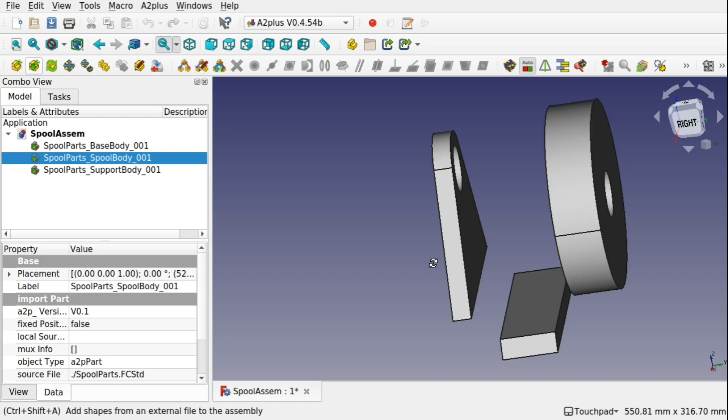Each of the bodies is a separate part which we will assemble together. We'll only briefly stay in the assembly workbench just to place those parts together. It is not the main focus of our workflow, but in later lessons we will go deeper into assembly workbenches and how to use those for animations and simulations.

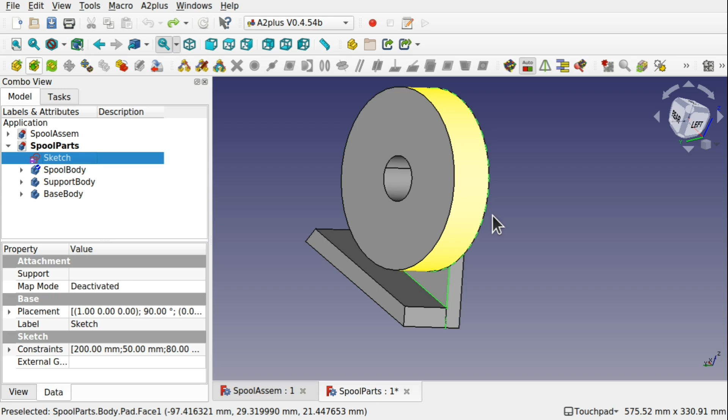In this video we're going to look at how to use a master sketch to create a very simple spool holder. So this is what I've created. I haven't put much detail in here, it's just to get an understanding of the process. So each of these parts are a separate body and they've all been created from one sketch. So this is the sketch they've been created from.

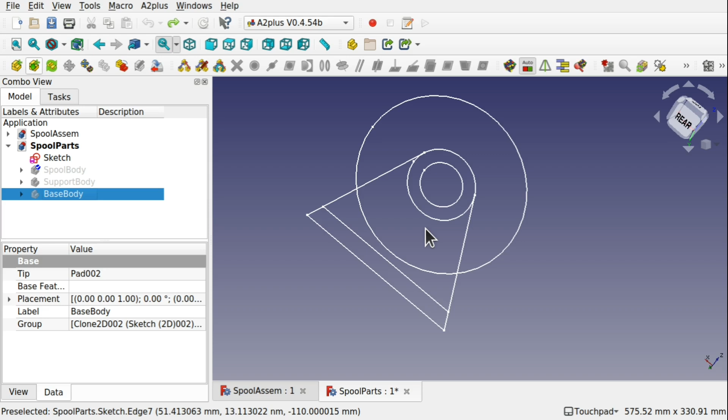If you come from a Fusion 360 background, then this will probably look familiar to you because you'll create a sketch like this and then extrude the parts, picking parts from the geometry and either using extrusions or pockets from there, where FreeCAD uses a more sketch on face route. It doesn't have that ability, but we do have this master sketch process.

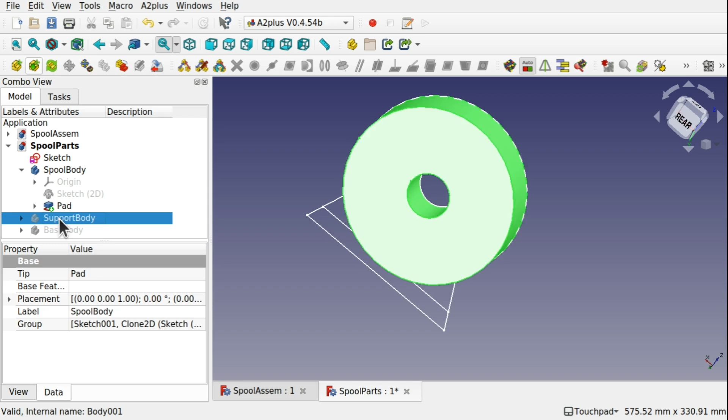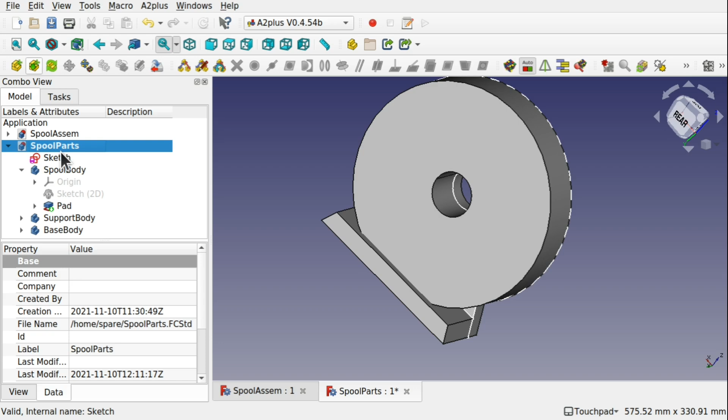So I have this master sketch here, which is all the dimensions basically from a profile view of that piece. We then use that in our spool body, our support body and our base body, which means that if anything changes in the sketch, say for instance I change the diameter of the spool, hit close, it gets reflected throughout the parts themselves. So I'm going to come back into that sketch and just change that back to 200,

and that's changed something like this height here to 150, and close that, and you can see how that's changed and taken effect there. So let's have a look how we do this in FreeCAD and learn about the technique.

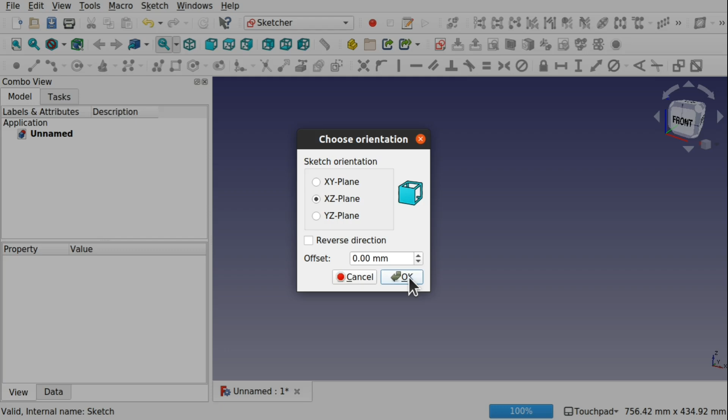So we're in FreeCAD and I'm going to jump over to the sketcher to create our master sketch. If I create a new sketch in here and go along the XZ plane, we're looking at creating a spool to hold some line or some string that we can store on a shelf somewhere. Now I don't know the dimensions of the spool, so we're going to be roughing this out in the master sketch, and this is what a master sketch is for.

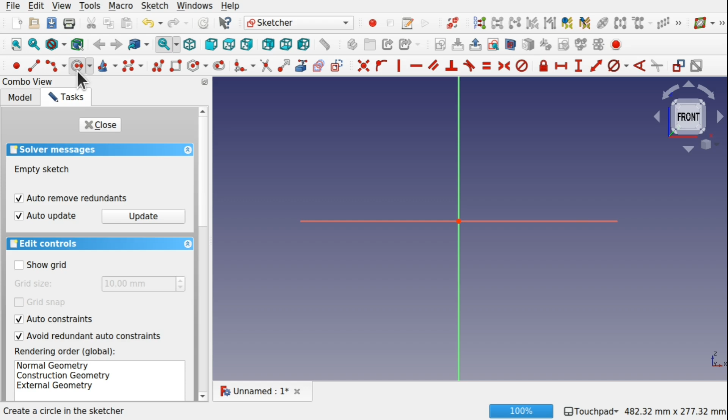You create your view from one side of the whole assembly and then you use that and reference it in your other sketches. So we create a circle for the spool, and I'm going to say I want this 200 millimeters. So we put the dimensions in here. This is important that we add the dimensions to our master sketch so we understand what we're looking at and how this is going to sit together.

Now for the stand, I'm going to create two triangular pieces. So I'm going to need a circle in here, and this will hold the bar that goes through here. So a bar will pass through here that will attach this spool to the stand. So I'm going to set the diameter of here. Now I may know my bar diameter, and I'm going to say it's 50 millimeters.

So now I get an idea of how this is going to attach. So the spool is going to be a circle with a hole in it that's 50 millimeters, and the bar is going to go through here. So I can create my other part of the stand now, and I'm going to put a circle in here.

And we're going to set the diameter of this circle. So click on the circle, go to the diameter, and we're going to set it to something like 80 millimeters.

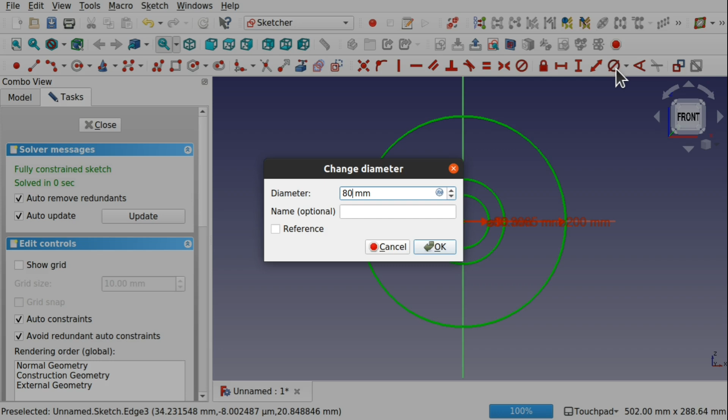Now I'm going to create the lines that come down for the stand, so I'll get an idea of, when I start attaching these lines, how far from the bottom the clearance of the stand should be for a 200mm reel.

Click and click. Escape that. Now they are sitting on there at the moment. This one is tangent to here, which is what I want. So I'm just going to delete that and add that one again.

So that point and this circle, I'm going to make them tangent. And this point and this circle, we're going to do the same, make that tangent. So the tangent constraints are on there, so they will follow that curvature of that circle.

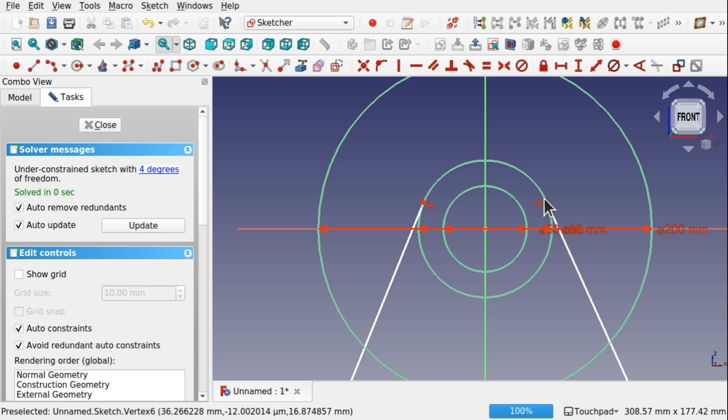I'm going to also click on these two and place a horizontal constraint against those so they line up horizontally. So when I move these, they move like so. I can now position these in the correct place.

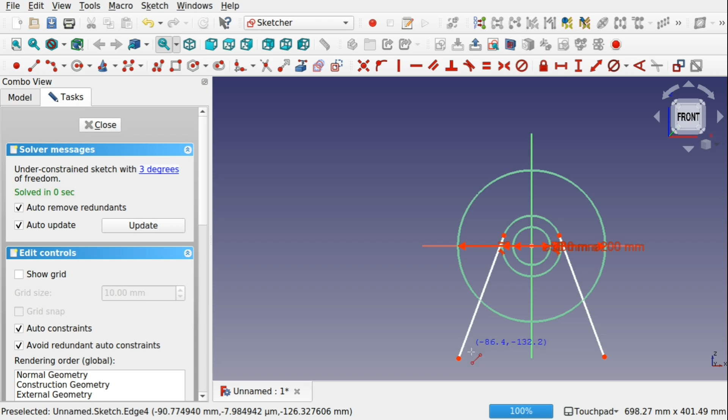And I'm going to create a line between these two points using the line tool and just connect up these two points like so, making sure our auto constraints are on. Let's put a horizontal constraint in there.

So now what we have, press escape. If I move this up and down, I can position this at the correct point, and my constraints are working with me to get this in the position that I want.

Now I may want to put some kind of mechanism in here that will stop this spool from turning when it's not in use. So I can add that, say by creating a block here and creating some kind of pin to stop this, and we'll put some kind of mechanism in there to actually stop this.

So I want a bit of clearance from there, so I would come over to the square tool and actually add that in there like so, and I can actually start creating some kind of mechanism in here. But I'm not going to go into that, I'm just going to keep it simple.

So I'm just going to Control Z that and remove that from there. We've got this now. This is the side piece.

Now I want to create some kind of block here that this will sit on, so we can get an idea of that. So I'm looking at, depending how I want this connected, do I want to just see something like this from the side and the block being in here, or do I want this sitting on top of the block and the block actually coming down here?

So for aesthetic purposes, I'm going to create a line going across here. So this is where our block will be that this will sit on. So remember, this is looking from the side. So this is the block that will sit along here.

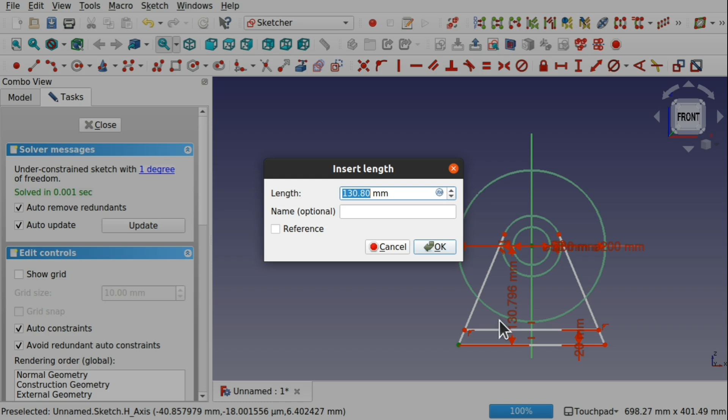So I can set my height now from this point and this center point. I'm going to place a height in. That's 130mm.

And we'll push this out to the left and this one to the right. And we'll just push this up. So we're just separating off these measurements so we know whereabouts they are.

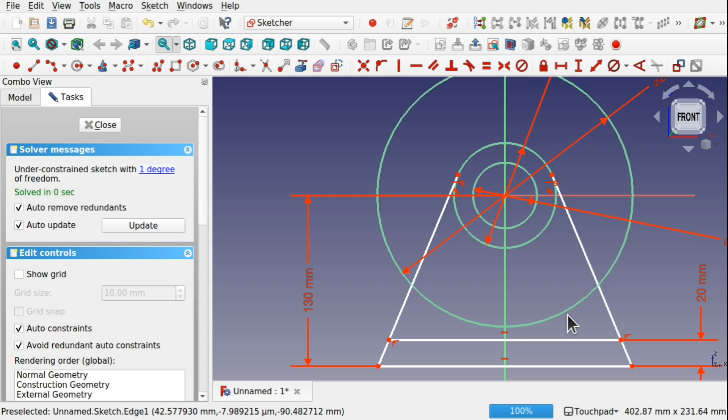I'm not worried about trimming these. I don't have to trim them. It's a master sketch. We don't have to worry about fully constraining the model. It's best to, but at the end of the day, it's up to us.

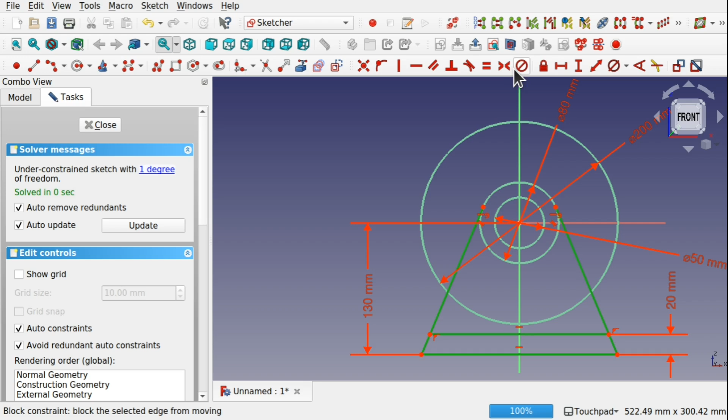If we fully constrain this and we know that nothing's going to move, because we're going to clone this and we don't really want anything to move. Now we can cheat and click all these like so and just use the block constraint against those, and that will block constrain them down. Because it's just a master sketch, we're not worried about the types of constraints that we're using on here.

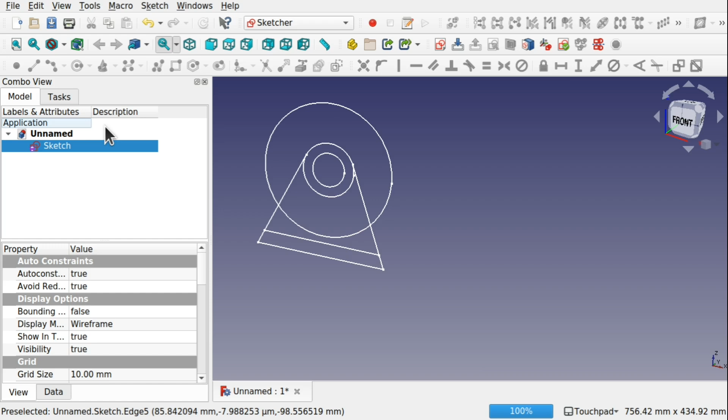So that's the master sketch complete. So this is from the side and this is what we'll be creating. So we can close that now, and our master sketch sits here. We can see that, and this will be basically the profile from the side of what we're building.

Now we can come over to the part design and start creating a body, and we'll create a sketch in here. But first of all, we'll create a body, go back, and we've got this sketch here, but we can't reference this sketch from outside of this body, so we're going to have to clone it in here.

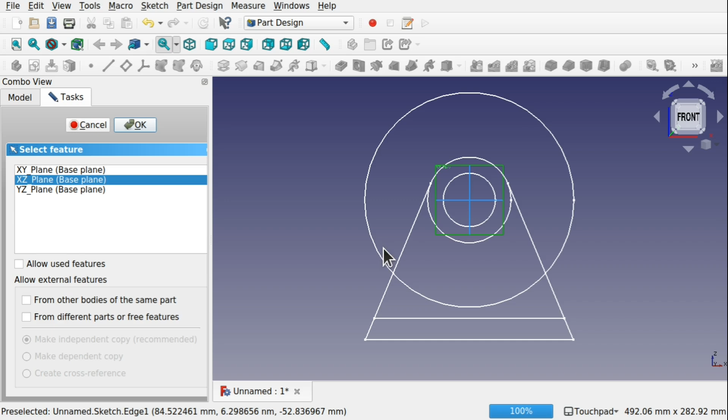Let me show you. Click on the body, come into tasks, create the sketch in there, and we want it along this plane, so the same plane as we've done this sketch in here, the XZ plane. If I hit OK, I'm in my sketch now, it's open. If I try to import the geometry, create an edge linked to external geometry, then I'll roll over this, you can see the object belongs to another body, can't link. So we're going to have to create a clone of this.

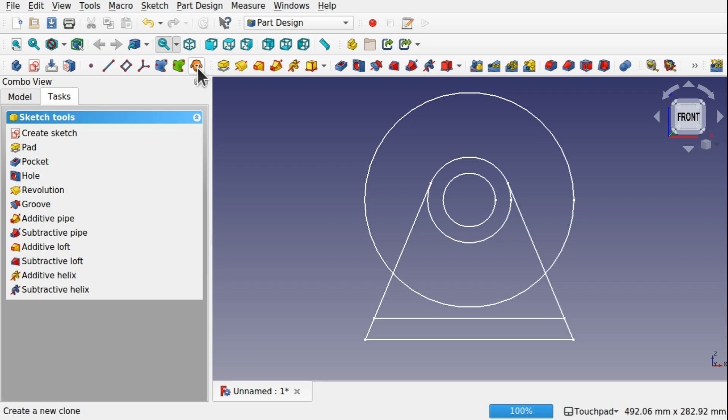So we actually clone this sketch in. We don't use the clone from here, create a new clone, because what I will do, if I click on the sketch, hit clone, it's cloning the body, and we don't want to do that. We use a different clone.

I could move this sketch into this body and reference it that way, but I want to keep this sketch outside because I'm going to be creating multiple bodies for individual parts. So we create the sketch outside the body and create multiple bodies for all those parts. Or we can link this to new documents and create the bodies that way, still using that sketch outside. So the main document, this one here, will have the master sketch in, and our other documents will reference this sketch. So this is the whole master sketch workflow.

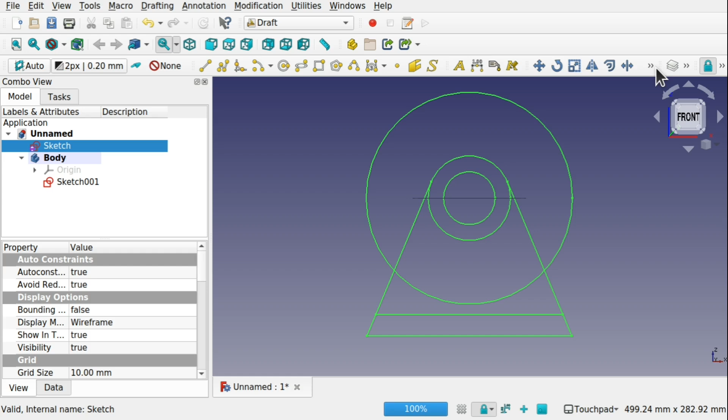To create a clone of this sketch, we need to come over to the draft workbench, because the tool exists there. So come into the draft, and along the toolbar you'll see the clone icon, this little sheep here. Creates a clone of selected objects. Also up in modification, clone, you can actually clone that sketch. So make sure it's selected and hit clone. That's cloned that 2D sketch there.

We now drag this because it's not inside this body. If we close out the body, you see it's not inside there. Drag it into the body, so it sits inside the body along with the other sketch.

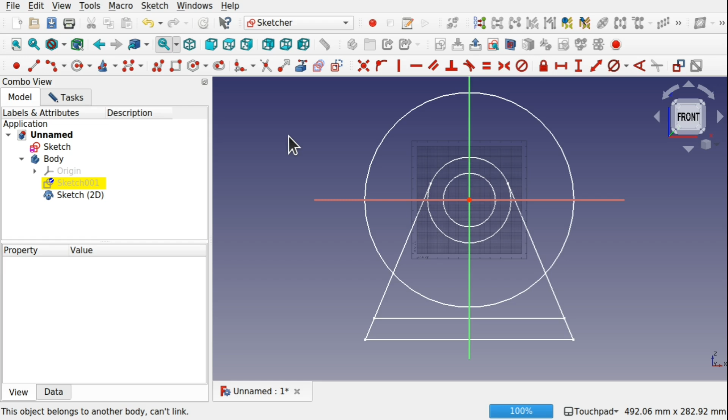We can now double click the sketch and start referencing these objects. So if I click on this geometry, you can see at the moment it's still saying the object belongs to another body. Let's come over to the model, and what's actually happening is that this sketch here is interfering. So click on it, press the space bar. You may have to hit escape first to get the mouse pointer back. Click on the sketch, it's better.

Hit the space bar, that makes that sketch invisible. Now when we come into the sketch and use the geometry, create an edge link to external geometry, and we start rolling over this, you can see it's been highlighted in yellow. And we can click on that and pull that in, like so. So at the moment, I'm creating the flywheel. So I've just pulled in that wheel. So we're in this main body, we've created the flywheel.

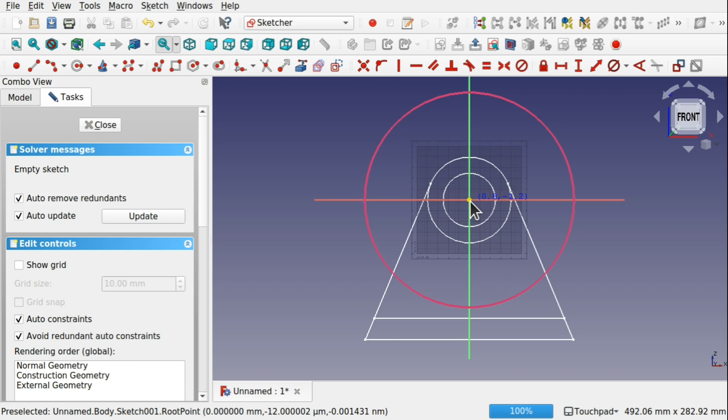And all I'm going to do is create a circle, like so. Connect it to the center, bring it out, hit escape, click on the circle, click on the external geometry that I've brought in, and make that an equality constraint. So that's created an equality constraint between those.

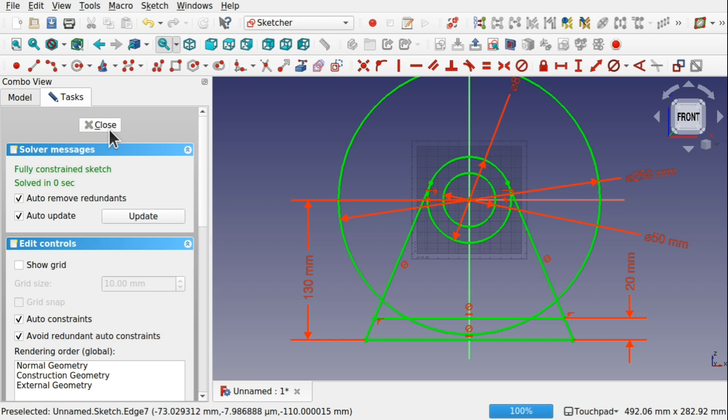So what will happen if I close this, that sketch is sitting there. Let's hide this 2D sketch, that sketch is sitting there. If I go back to my original sketch and find this circle here, which is the 200mm diameter circle, if I change that to something like 250, it will move outside of here. But when I close, that sketch has changed.

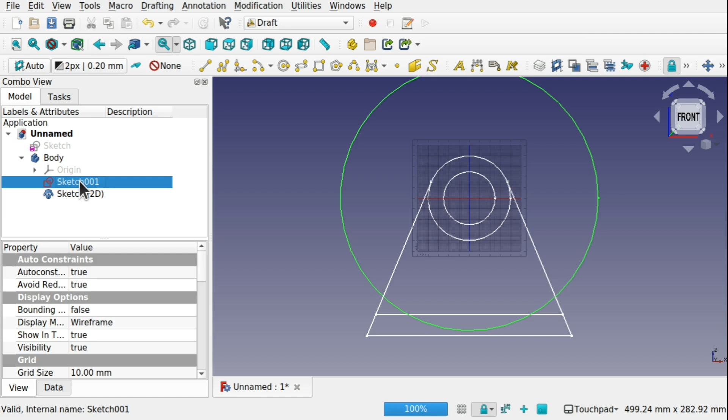If I bring back the clone sketch, you can see how that has changed and it's conformed to that clone. So this is the beauty of a master sketch. We can change our original plan and allow all the other sketches to recompute and update to that clone. Let's go back in that sketch and, well, first of all, let's go back to the original sketch and change that back to 200.

We're back to normal, close that, and we're back. So we've got the sketch open.

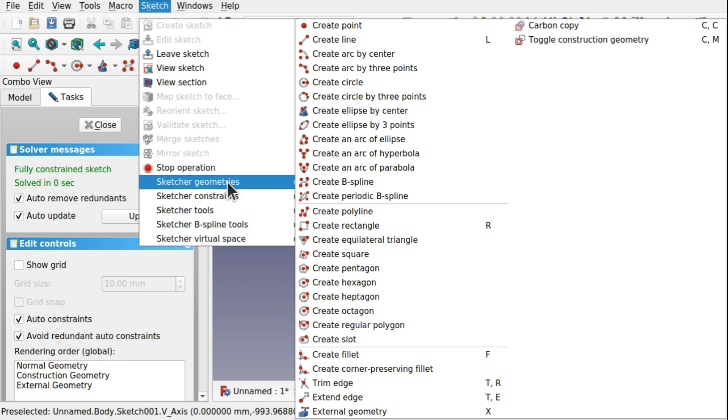I'm going to double click the sketch and bring in some other geometry here. I'm going to bring in this inner circle, using the create an edge linked to external geometry, also available on sketcher geometries, external geometry there. And I'm going to pull in this circle here.

And this is going to be the hole. So again, I'm going to create a circle in here, click on the circle, click on the outer sketch, and do an equality against those.

So I've created now the spool, or the start of the spool. If I wanted to, I could do this as a revolve, bring in this geometry and start cutting the geometry, but we're just going to keep it simple and just create a simple extrude with this.

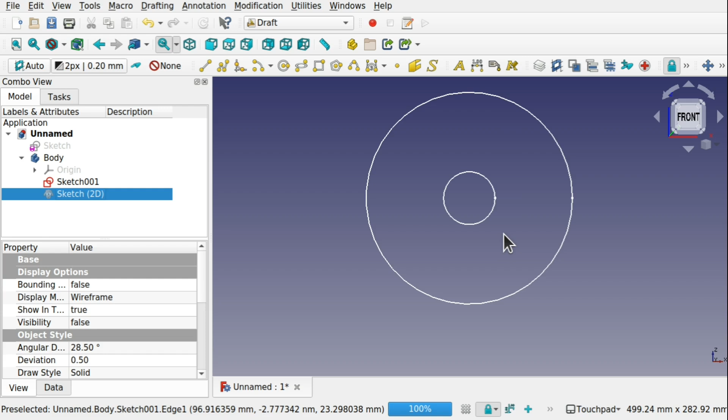So if I hit close now and hide this sketch here, we've got this here. We're still in the draft workbench. What I'm going to do is come over and just take that grid away, hide that grid. And I'm going to come over to the part design.

And I'm just going to extrude that sketch. So I'm going to click on the sketch, and click on the pad, and decide how far I want to pad this. So I'm going to go around about 50 millimeters.

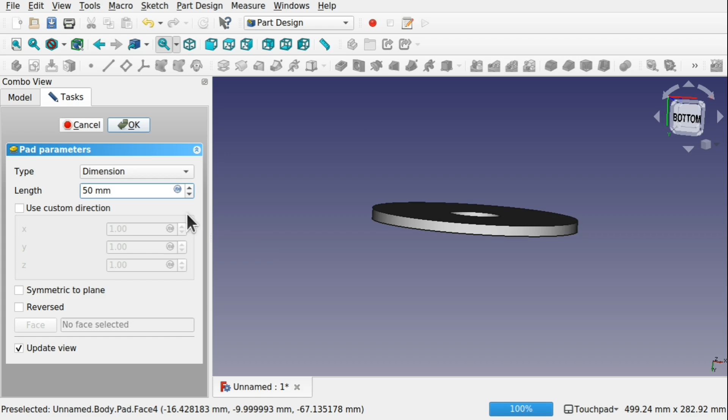Going to keep it symmetrical to plane. It's up to you what you want to select from here. So that's what I'm going to select for that one. So we've got the start of our spool.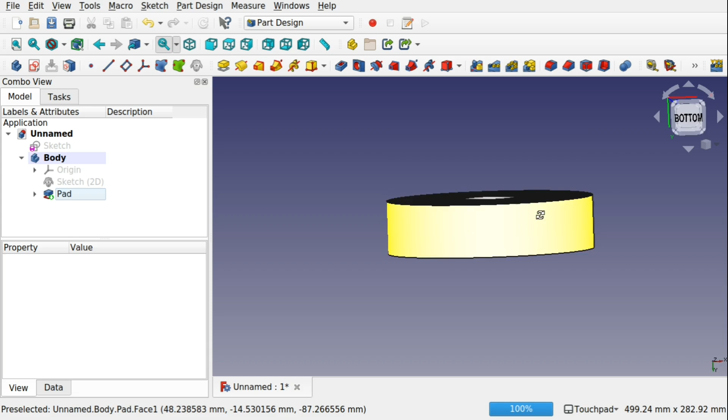Obviously I need to section out this section in here with a groove or some kind of pocket in here. But this is just to get an idea of the master sketch workflow.

So let's bring back the sketch and look, see what we've got. So we've got those at the moment. We can see how it's sitting there.

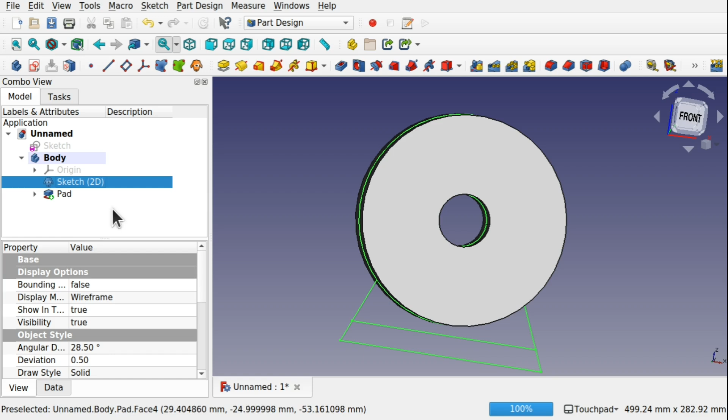Matter of fact, I'm going to bring back that pad and take the symmetry to plane off, and just put it reverse at the moment so it's sitting behind there, and OK that.

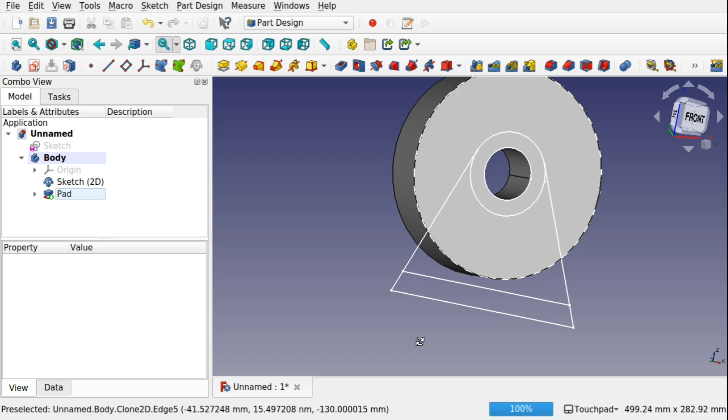Now I'm going to work on these parts here. So for that I need a new body. So create a new body. So body 001. And we can do the same.

We can create a sketch inside this body. So at the moment it's outside. And I'm just going to clone this again into that body. So come over to the draft.

And click on that sketch. And again come over and create the clone. Drop that clone into that body. And we can start working on that.

Might be worth renaming the bodies as well. Rename, and call this one spool, and this one is going to be support. So right click, rename, and change this one to support.

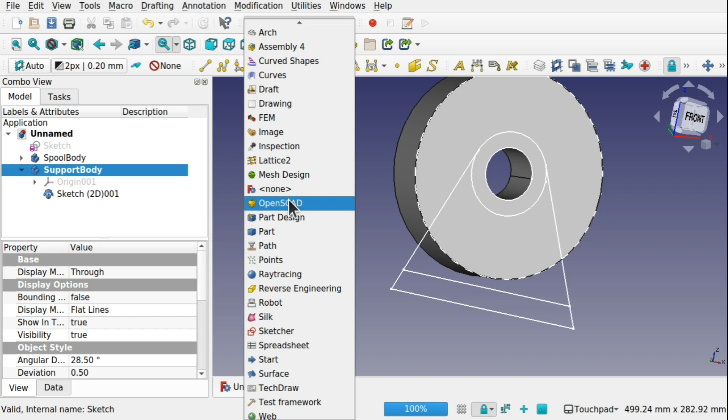Come back into the part design, and we've got that body sitting there at the moment. It's active, it's bold. If it's not, just right click, toggle active body, or we can double click and they will become active that way. So see that one's active.

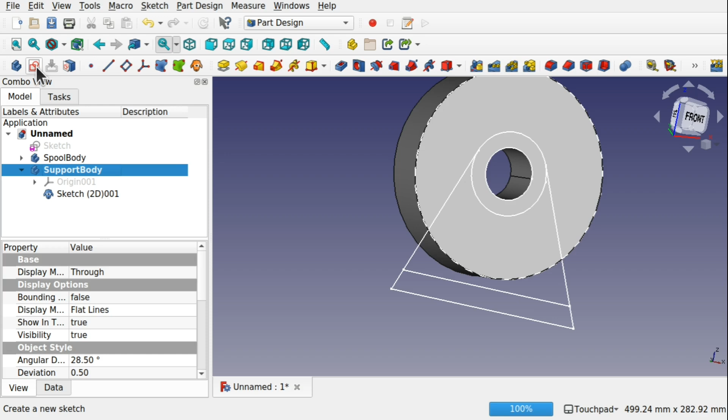Click on that body. You can either come over to tasks or use the create a new sketch from there, and we'll create a new sketch, and we're looking along this plane here, so we want to be using this as a sketch element to pull in. So click on the XZ plane again and hit OK.

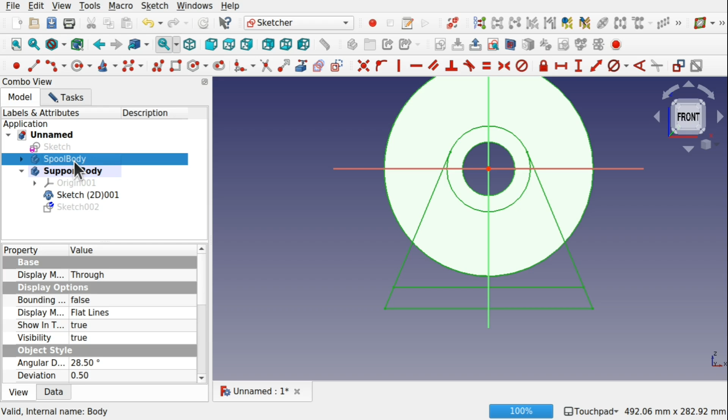Now at this time you may want to come into the model, come up to the original body and press spacebar to hide that. Make sure if you go inside the body you want to hide this sketch as well, otherwise it's going to start interfering. So click on it, press the spacebar, that will hide that sketch.

We're now going to work with this sketch here. So just collapse your spool body and we can start working with this sketch. Now I want to import some geometry again, so use the create an edge linked to external geometry, and start importing this edge.

And the bottom edge, and we're going to take the top as well and work with those just for the time being. Now I can use that to virtually trace against, so I'm going to place a line that connects up here. And we're going to do the same with this one, and the same with this one.

And now I need a curve. It's showing it's over constrained at the moment.

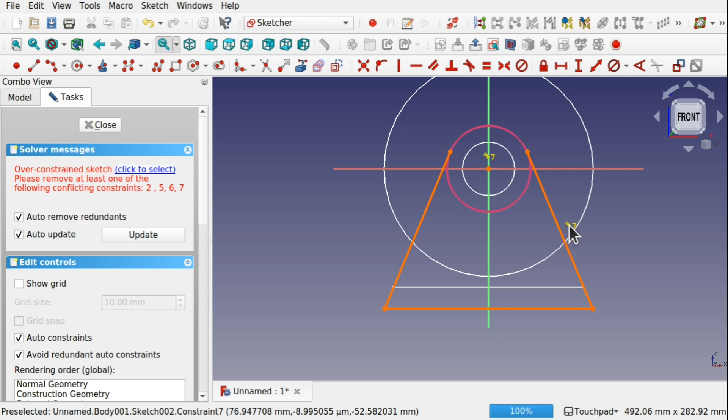So let's come into tasks and you see it's over constrained. Please remove at least one of the constraints. Let's click on this one here and just delete that. So this one, hit delete, that's better.

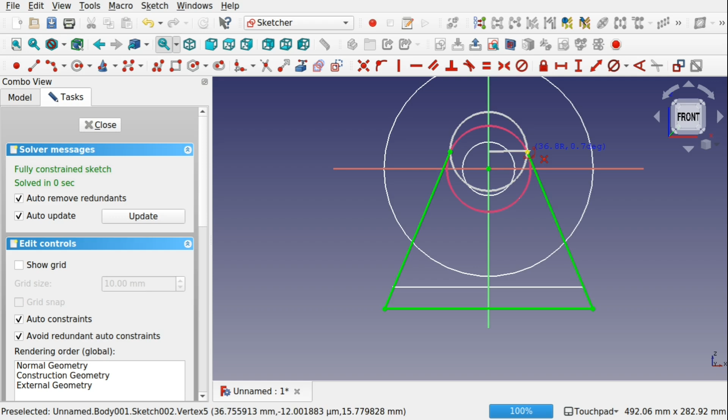Sometimes it will constrain to parts of geometry, just find them and delete that. Now we need a 3-point arc, and that's this tool here. Normally when you come in, it's on this arc. Just drop this down and use the endpoint and rim point, and we'll click, and create that so it's tangent to that arc there. You can see it's fully constrained there.

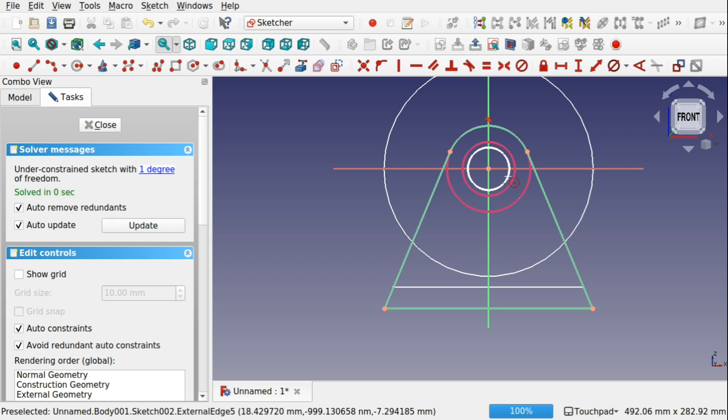I'm going to bring into geometry again, select this circle here, and again use the circle inside here like so, and then just click on the circle and that outer circle and create an equality constraint against there. Fully constrained, nice and clean.

All of the sizes and dimensions are hidden over in our other sketch, our master sketch, and we've got a nice clean sketch to deal with. Hit close and we'll pad that.

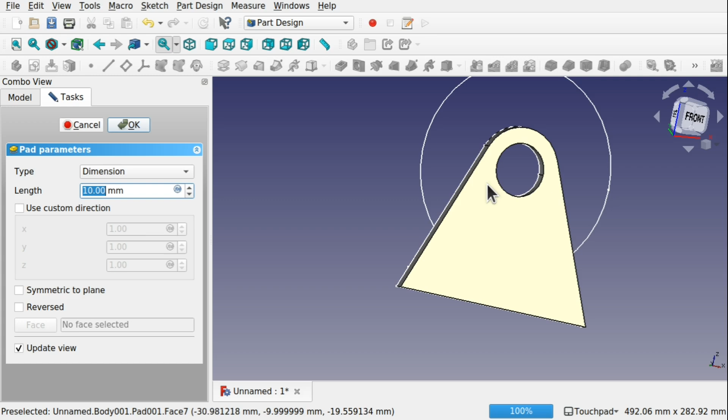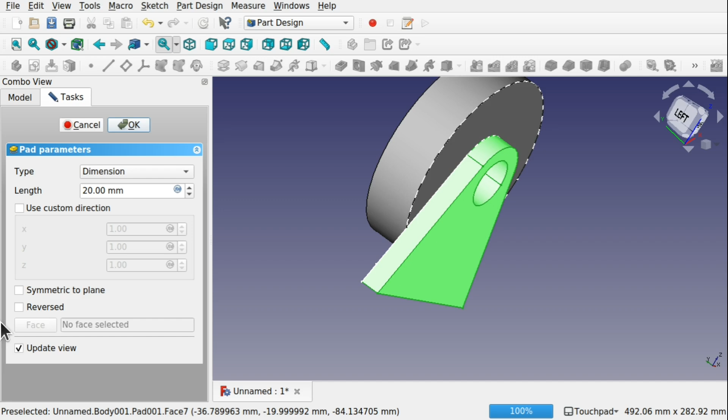Now we may want to do it in the reverse direction, so I'm going to come over to the model, bring back the support body. It just gives you an idea of where this is placed, so that's fine. So if we take that pad, what we've just done over in tasks, increase this to something like 20 millimeters, you can see that's been padded forward in that direction. If it hasn't, then you hit reverse, it comes forward. But it's up to you.

These are going to be put together separately anyway. We can cut these out or print them on our 3D printer. It'll be up to you how you want to actually output this.

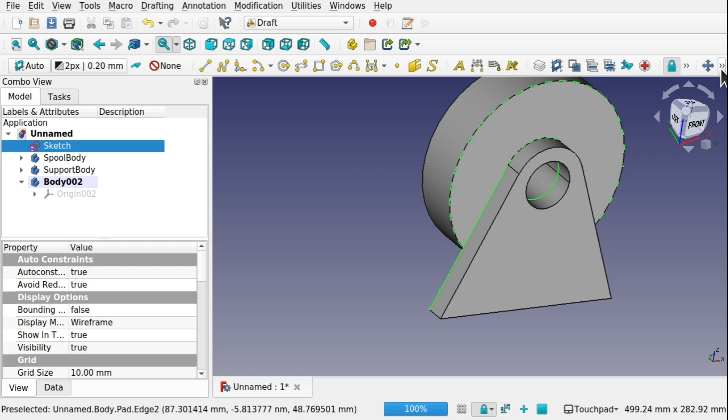So we've got the supporting body, we've got the spool. Now we can move on to the base. So again, come in, hide these, create a new body, sits there, click on the sketch, come over to the draft and create a clone. Move that clone into the body. So we've cloned the sketch, hide these two.

Making sure that if you come into the supporting body, that sketch is hidden as well, otherwise we'll try to reference the sketch and we'll get nowhere because it's in another body. I'll show you that now.

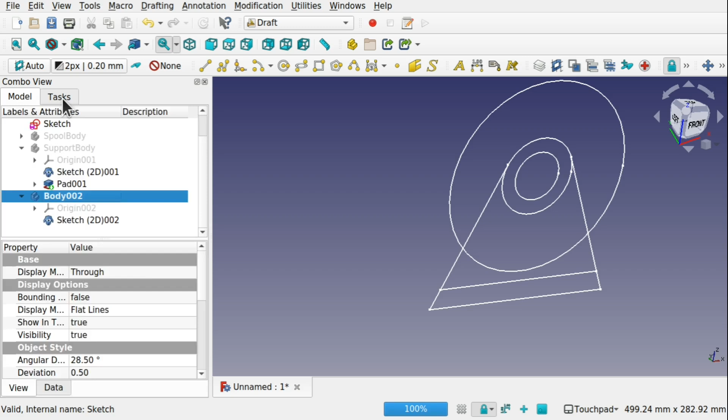If I bring back that sketch, pressing the space bar so it's not hidden, click on this body, come up to tasks. Let's go back to the part design workbench, be a good idea. There we go, tasks, create sketch there, because I've clicked on the body, create sketch here, or come over to task, create sketch. And we want this plane here, which is the XZ plane, okay.

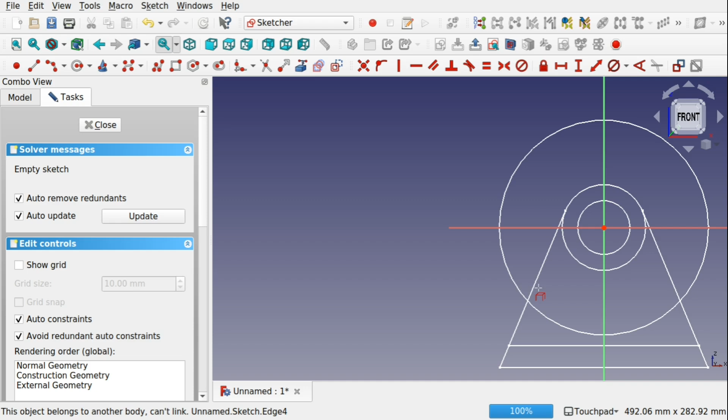If I try to reference this now, it may complain. You can see it's saying the object belongs to another body down the bottom left hand side. And that's because we've got this sketch available here. So just click on it and press the space bar. You won't be able to click on it at the moment because we've got our tool selected. So hit escape, click and hit escape. There we go. And get the mouse pointer back and we'll click on that sketch, press the space bar.

And now we can come in and click on the geometry. Also making sure that we've got the other sketch hidden as well, this one here. That's better. Now we can select that. Should be able to. There we go, you can see them highlighted in yellow. Now this is the base, so I want this line and this line brought in.

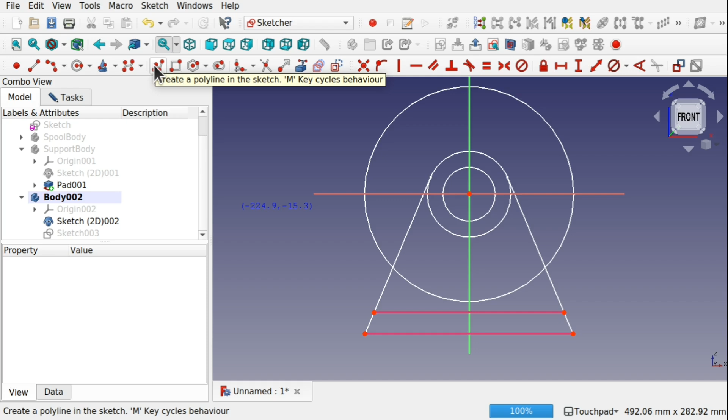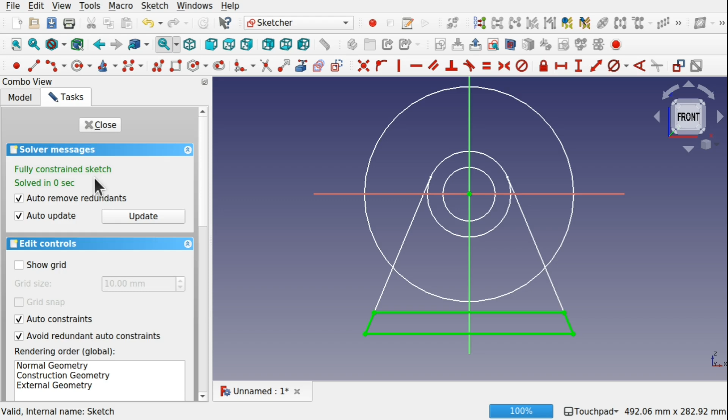And we can create lines against those. So I'm going to use the create a polyline in the sketch and click on that point, connect up, and you can see they're going green. Connect up like so. All done, hit escape to get your mouse pointer back, or click and hit escape and come over to tasks. We can see, go down, we can see the geometry that we've brought in.

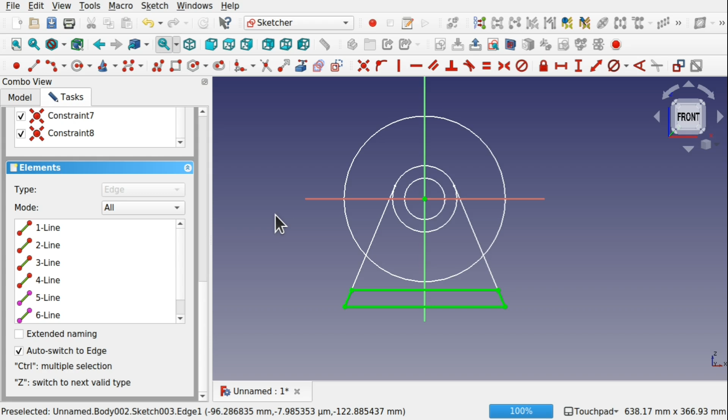So we've brought in the two lines, they're in purple. So I'll bring this down, external, you see the two lines are in purple, purple dots at the end, and the normal geometry is the four lines we placed in, all, you can see them all there. So we're all constrained up, ready to go.

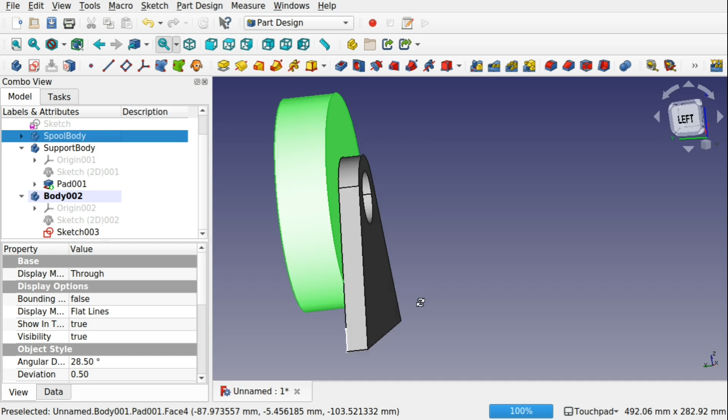Hit close, and we can hide this sketch, this cloned sketch, press the space bar, and we're going to pad this. So I'm going to bring back the support body and the spool body. We can see our sketch is sitting there, and we can pad that.

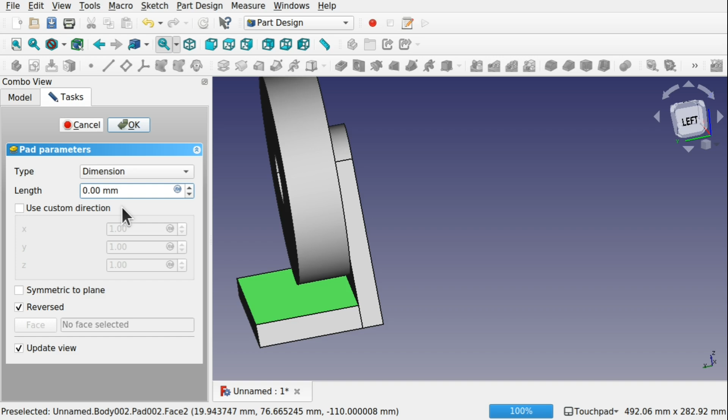First of all, we need to click the sketch and pad that. So I'm going to the reverse direction, and I can see that I can send this way around about 100 millimeters, a bit too much, 80 millimeters.

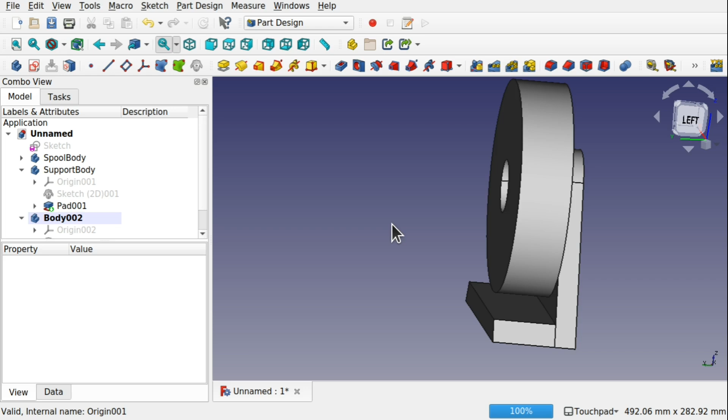Let's try 60. There we go. And we can then clone this over the other side. But what we've got, once we finish that, we've got 3 separate bodies for the individual parts that we can use in an assembly. We can place this in assembly. So for instance, we can come over to our A2 Plus and pull these in here.

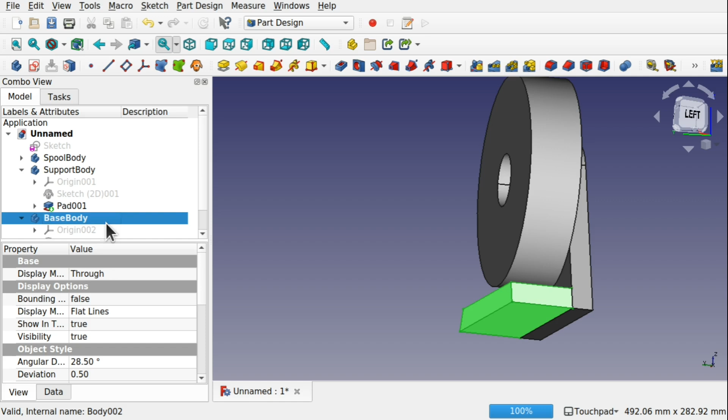So I'm just going to rename this to support. Well, it's actually the base, isn't it? Base. Body. So we've got all those there. We want the individual parts because we either want to print them individually or we want to cut them individually on a CNC machine. Obviously we need some more detail in here, but now we've got the base in here, we can do that. This one's going to be duplicated up to place on this side. So we've got all those there.

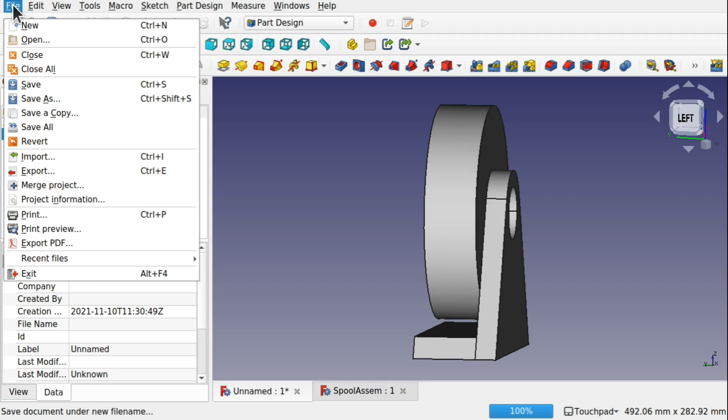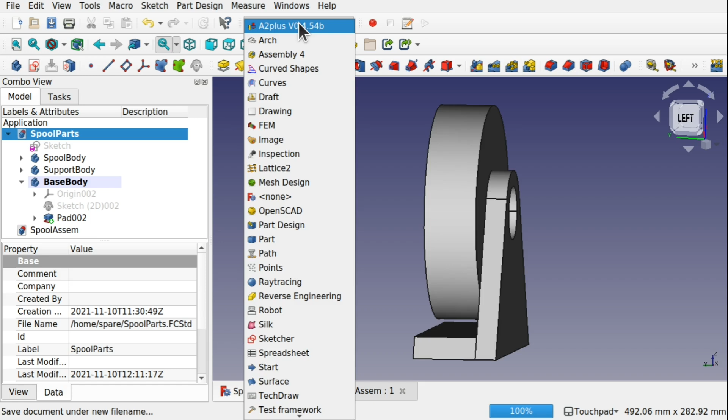What I can do is come in and create a new file and save this file, save as, and we'll call this one spool assembly. And we need to save this one as well. So this one here, file, save as, call this spool parts. And then depending on what workbench we're using, so I've got this A2 Plus workbench and the Assembly 4 installed. So for instance, I use the A2 Plus quite a bit. This is available on Tools, Add-on Manager, and you can actually install it from there.

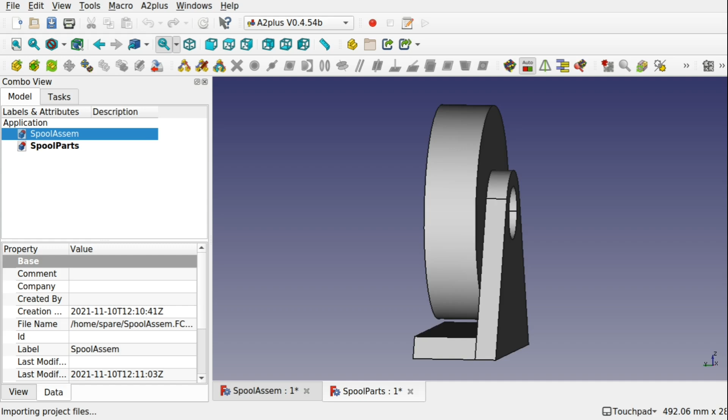And if we're in the spool assembly, so we're in this one, we can actually start bringing in the bodies. So add shapes from external file, spool parts, open, and we can pick our shapes in here, individual shapes, import them like so, and let's place them like so, and we can use these to assemble against. So my base is going to be fixed position of true, which it is at the moment. These should be fixed position of false.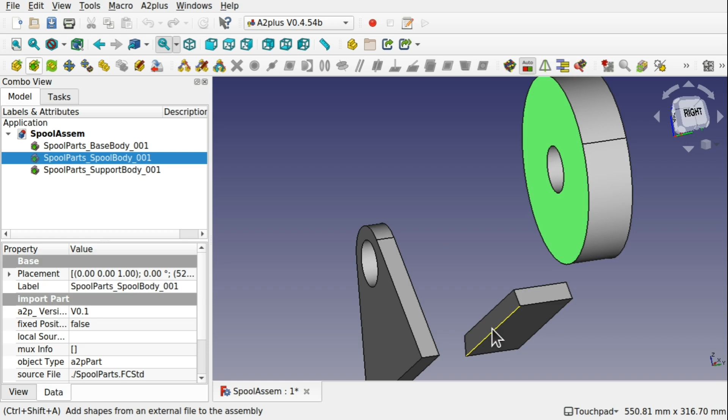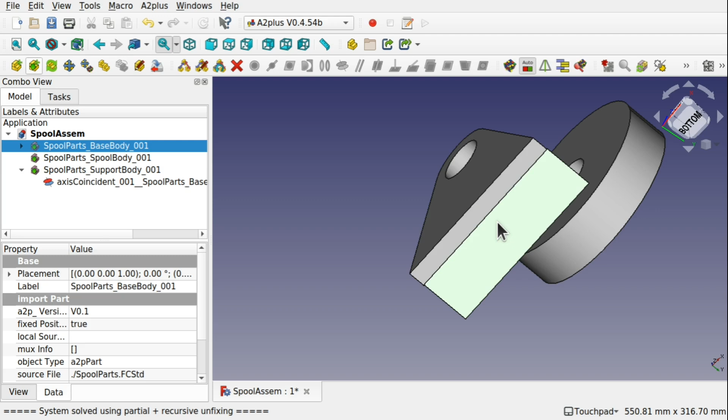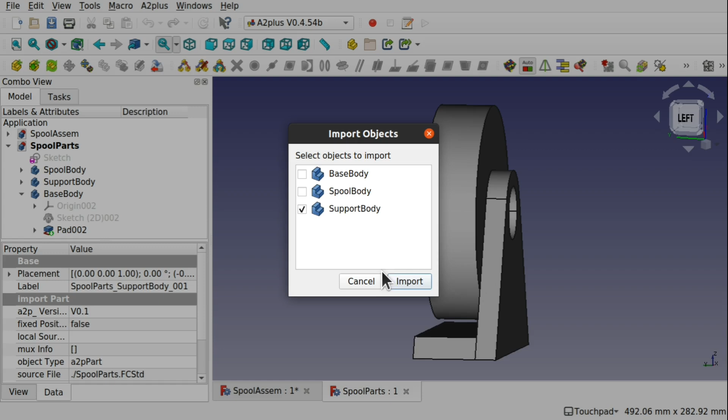And we can start clicking on parts of this. So for instance, click on that edge and this edge and place them on axis, set that, and we can move this one into position like so, and just slide it into position. It's just to get an idea of what this will look like. We can pull another one of these in by just using the import and spool parts, open, and which one do we want? We want the support body, import, and we'll bring this around this side.

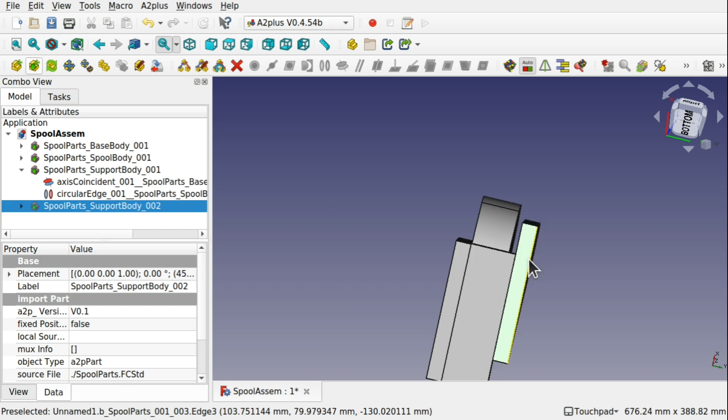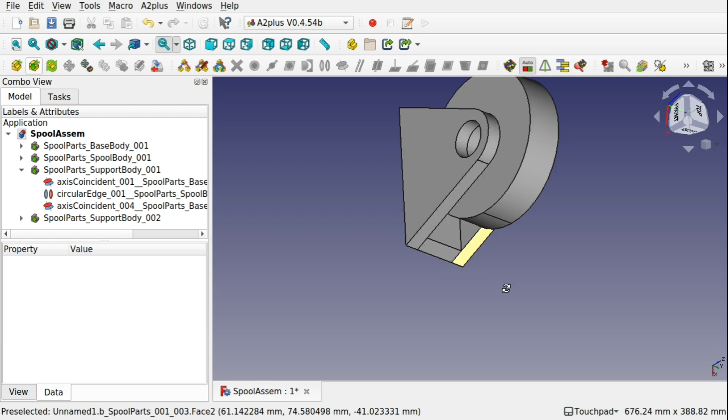Let's just dump this down here, and we will click this one and the inside edge of here, circle and circle, accept, and also this edge and this edge, axis, accept, and we'll just move that one down into position. And we can use this one and this one and create an axis on that one to make sure they're lined up, and the same on this side as well. Set that. So you can see straight away we can put something like this together, and if I have a look, we can see we've got some problems here.

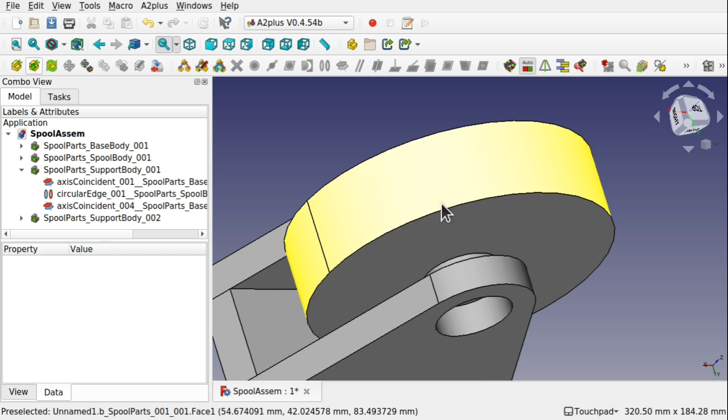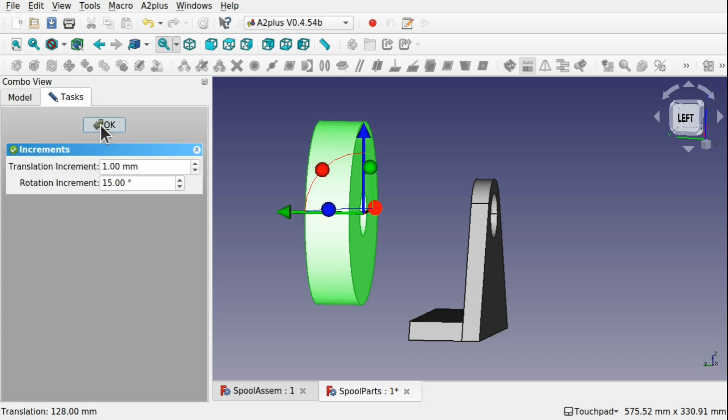We've got a bit of gapping in here, so depending on how far I want this away, I should put a rod through here as well. Now I can alter this, create offsets, etc. Add rods in here, add bearings, etc. But that shows you the workflow of that master sketch. If I go back to it, so file, recent files, and spool parts, you can see we've got everything there. We can transform these if we so desire. So we can cut these individually, create a technical drawing, or place this on a CNC machine ready to go.

So I hope that's helped with understanding the Master Sketch workflow and how you would use it for assemblies and roughing out your models, and then take that further with creating the parts, assembling them, or even just creating those individual parts ready for CNC, ready for 3D print, or just creating a technical drawing.